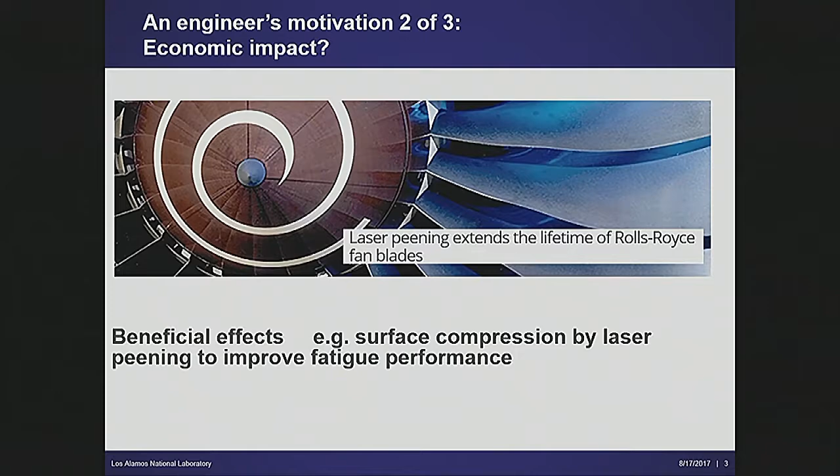You better believe that for a business that's $60 billion plus or minus, people are interested in whether or not those residual stresses have been put in reliably and uniformly, right? It's not science per se, because it's an engineering question. On the other hand, the tools that you've been learning about, whether they're neutrons or X-rays, can certainly address that question. And of course, a fundamental question for engineers: is it safe? This is a binary question. It's a question where the answer is yes or no, right?

Whereas we can vacillate a lot in the science and say, well, maybe, in the question of safety, it either is or it isn't. And so there's this perennial tension between product quality and process cost.

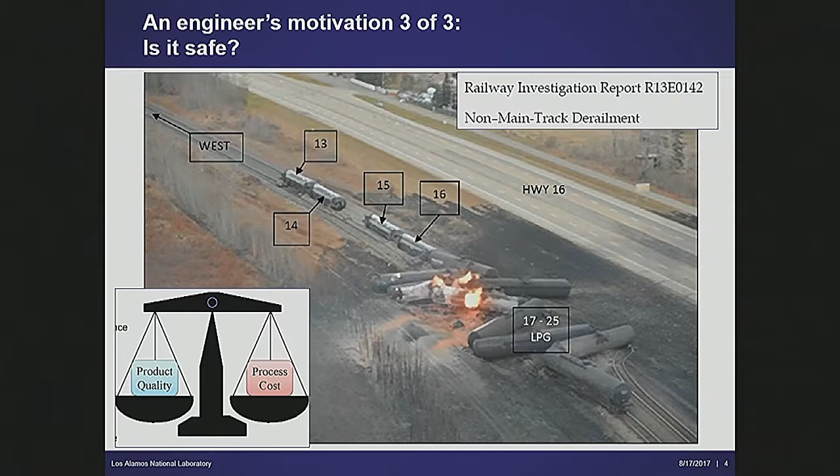Let's broadly lead into the discussion, but if you picture those sorts of questions and map them to the insights you've been getting, whether it's in diffraction, reflectivity, or inelastic scattering, you can start to see, with the knowledge that I have, can I translate those insights to a community that doesn't care about the science but very much values the insight you can get?

So what I'm going to do for you is basically talk to you a little bit about Los Alamos, explain the engineering context of what we do, talk about LANSCE for a few moments, then hopefully add a little bit of value by giving you some historical perspective of the stress measurement technique, for those of you that are mechanical engineers, and those of you that are interested in how you ended up with the measurements that you're doing on HFIR, on friction stir weld, or the sorts of activities going on at Vulcan. I'll talk about instrumentation, then I'll talk about basically two examples.

One relates to a uniquely neutron measurement, which relates to bridge cables, and the second relates to a series of relatively new activities we've been doing at the APS. The reason I chose those two was both to identify the opportunities with neutrons and to show, to some extent, the complementary aspects of them.

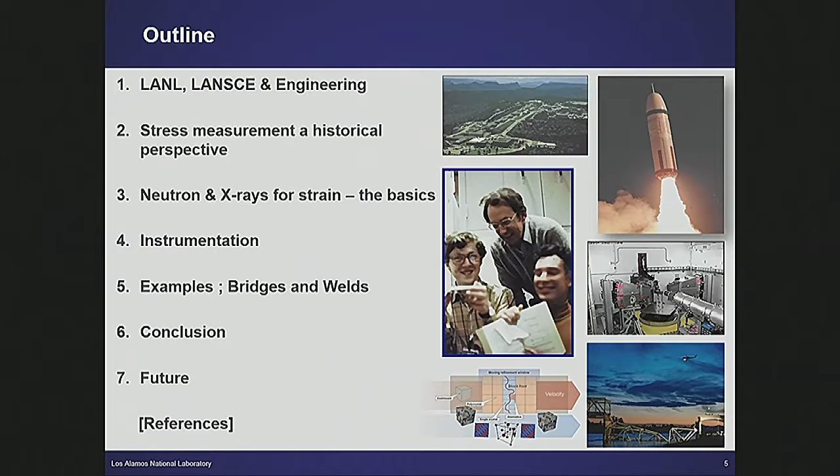Oh, by the way, I'm quite happy for you to jump in with questions if you want to interrupt as I'm going along. It makes it more interesting for everyone.

So, Los Alamos. There are—you've been at Oak Ridge, you went to Argonne—there are two national labs. They're both part of the Office of Science, BES-funded labs. There's another class of labs funded by the NNSA, the National Nuclear Security Administration. Los Alamos, Livermore, and Sandia are the primary ones. The Los Alamos budget is about $2 billion a year. It's got about 10,000 employees.

About half of those employees work outside the fence on a range of scientific endeavors, primarily focused on and underpinned by national security issues. So it's everything from cybersecurity to infrastructure, roads, biological—you can map national security to lots of things.

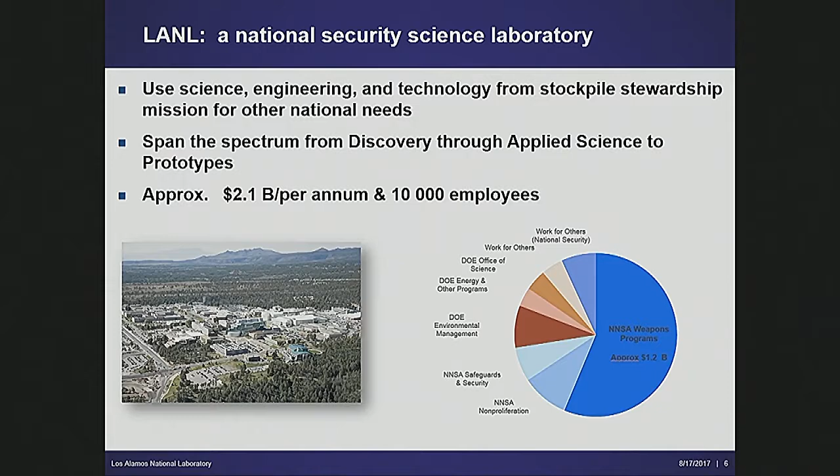But the key activity at Los Alamos, and the reason it's been there since 1943 or so, relates to the nuclear weapons program. The key mandate for Los Alamos right now is how do you establish and satisfy yourself that weapons in the stockpile are safe, reliable, and secure.

At one level, that probably seems like a relatively benign question, but at a different level, you need to be confident that something that's been sitting in the stockpile for 20 or 30 or 40 years is going to operate just the way you want it to. This is a very complicated system—it's undergoing radiation damage, thermal cycling, and some corrosion.

Without going into the details, you can dig into that and find there's a lot of engineering questions relating to corrosion, thermal cycling, cracking, and fatigue cracks that exist in these rather complicated, important objects. And so for that reason, Los Alamos supports—

Actually, yeah, this was just making my previous point. Some of the engineering challenges we engage in relate to: if you're going to replace a material using an additively manufactured component, what are the questions you need to ask in order to be confident that a component with a very different microstructure behaves the same way in an extreme environment?

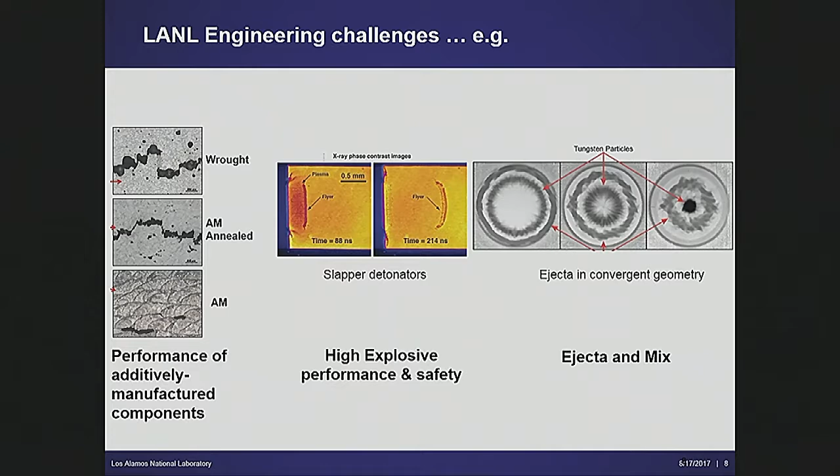And then there are lots of questions relating to the fundamental physics of mechanical performance under extreme conditions. It's not really a talk about the dynamic issues Los Alamos cares about, but you want to be confident that a metal that performed and deformed in one way 20 years ago performs the same way in 2020. By virtue of that fact, Los Alamos supports a variety of facilities.

There's probably a dozen or so facilities, ranging in scope, to actually probe material science questions in different ways. The one that's pertinent to us here today is the Los Alamos Neutron Science Center.

Before there was SNS, there was IPNS, and after IPNS, there was the Lujan Center. The Lujan Center hangs off a linear accelerator, a proton accelerator, 800 MeV, about a megawatt in power. There are basically 5 facilities that run off this facility, which qualitatively from 30,000 feet looks similar to SNS. It's very different in practice.

There's the Lujan Center, which has got a variety of instruments not dissimilar to the ones that are here. Power of the source is probably 10, 20, 25%, depending on the metric you want to use. But you can do the same sorts of things that you do here, primarily focused on diffraction and engineering physics right now. There's a facility for doing nuclear physics, which is a fast neutron unmoderated target.

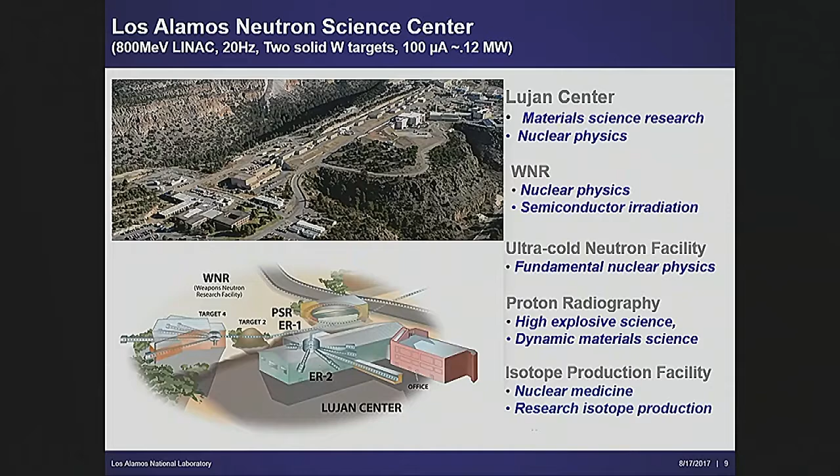There's a lot of isotope work that goes on there. There's a UCN facility, an isotope production facility, and also a proton radiography capability where we do a lot of dynamic radiography, studying shock and materials response at the microsecond to nanosecond timescale, primarily relating to capturing detonation.

So now with that as preamble, let me turn to a brief historic perspective of stress measurements. I think that you're doing measurements at HFIR. Good, all right, so a few nods, that helps.

For context, I started making measurements at the Dido and Pluto reactors, using very similar approaches to the sorts of things you're doing at HFIR. I graduated through and eventually built one of the engineering spectrometers at Los Alamos called SMARTS, which is a variation on Vulcan.

To put it in context, and I think this is just to let you see the background of how you've ended up here. I'm gratified to see that 10% of the people were engineers, the opportunity for actually using these for engineering. But to put it in context, residual stresses, residual strains were first alluded to in about the 20s by Heyn, who suggested that there was some kind of elastic strain present after plastic deformation.

In the late 40s, Greenough actually defined the term residual strains in plastically deformed metals. And then pretty quickly after that, this parlance of type 1 macrostresses, type 2 microstresses, and type 3 microstrains came into being.

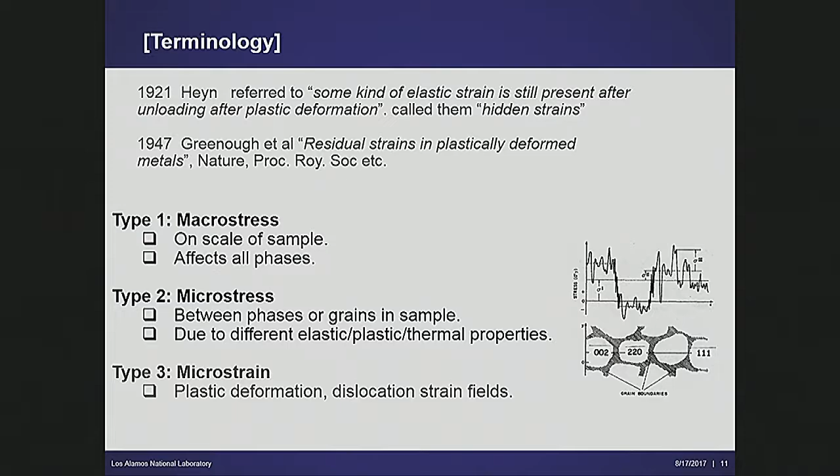The fact that neutrons could potentially touch the problem was first recognized in the 70s, where Hank Prask, who was working with guys from the Navy, mostly at NIST, made this observation: neutron technique may be sufficiently sensitive to strain as induced by residual stress to have practical utility.

Neutron depth profiling might be useful for measuring subsurface residual stresses. It's an observation that, because objects are metal, you can still get an appreciable neutron signal through an inch or so of steel, you can make measurements. And they made this observation: depth profiling might be useful.

The first actual measurements of neutron depth profiling with residual stress happened in the 80s. Those of you that have spent any time at NIST might possibly recognize a very youthful looking Andrew Allen, who works there on their small angle scattering program. This activity led to a paper in NDT, a non-destructive testing journal.

This led very quickly to the first commercial work, as people saw what they could do, and then the Dounreay fast reactor said, well, okay, can you make some measurements of residual stress in a weld for us? And they took the first chunk of money for actually doing these measurements at the Harwell reactor.

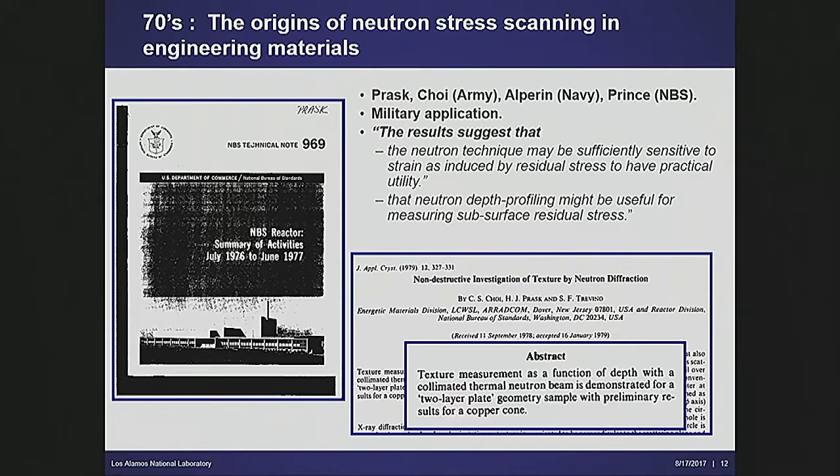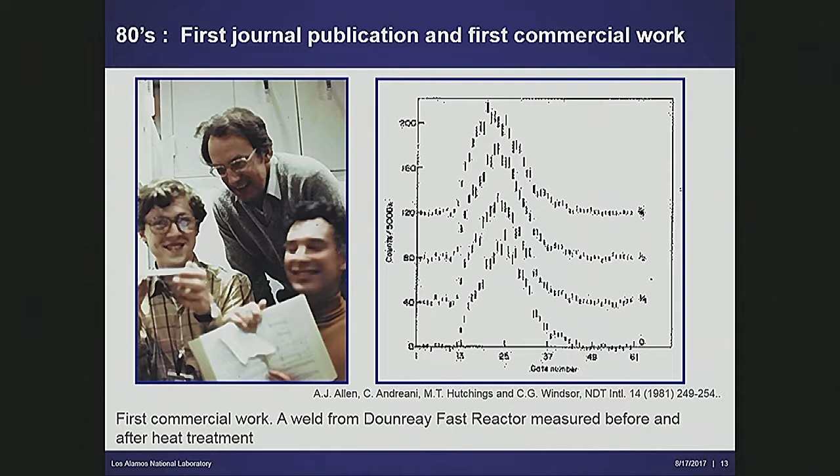In passing, I would note that in the community, there's a little bit of tension as to who did this first, because this set of people, actually, they're not around these days, wanted some credit for doing it first. But actually, the first people that got journal publications were this other set. So in the community, there's been a little bit of tension on occasion looking about that, but it's ancient history now.

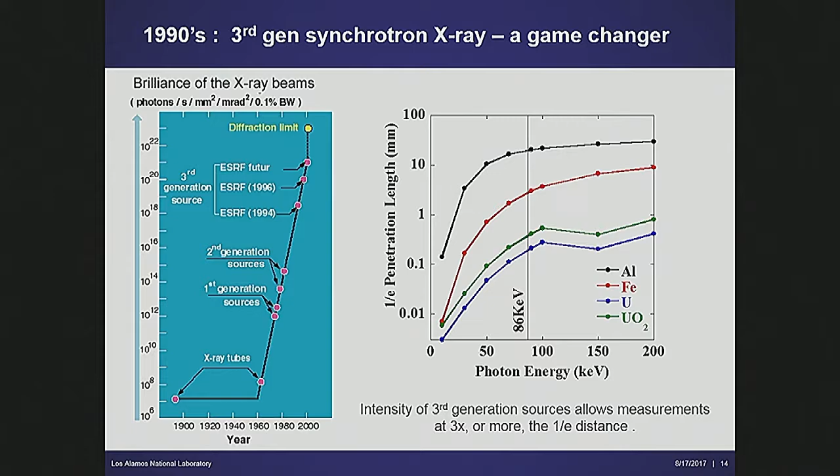Over the course of the 80s and into the 90s, the mechanical engineering community said, wow, neutrons are fantastic, how are we going to do this? Then in the 90s, third generation synchrotron X-ray sources came along. In 1990, if you'd asked me how to do a residual stress measurement in a piece of steel this thick, I'd say the only game in town is neutrons. Now, with high energy photons between 50 and 150 keV that you can tune, you can push through appreciable thicknesses of materials - low-Z materials like aluminum, but even things we care about like uranium, you can get through pretty big chunks of material. The nature of the measurement is a bit different, and there's plenty of space and complementarity between the two techniques, but it's important to look at both at the same time.

Another important note: if you're going to engage an engineer in the unique measurements you want to do, one thing they care about is standards. They want to be confident that a measurement at SNS is the same as a measurement at ESS, is the same as a measurement at Los Alamos, if they're going to draw a conclusion beyond what you'd put into a peer-reviewable paper. In a peer-reviewable paper you can have caveats - you can say here are the measurements, and legitimately note some errors. But if an engineer is going to decide whether a bridge is safe based on your measurement, you've got to have standards.

Over the course of the 90s, there was a lot of work, particularly in the neutron community, to establish and define standards for making measurements. That meant a series of activities making what were called round-robin samples.

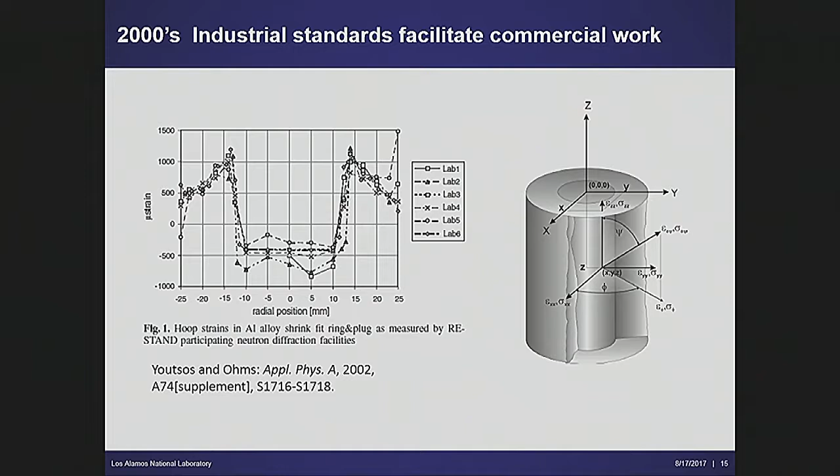If you're writing an intuitive paper just asking what the stress profile in the system is, it doesn't matter - I can give this talk perfectly happily. But if you're going to draw a conclusion about whether something is safe in some application, you better understand why these labs measured something 50% different on the same samples. It's not far removed from the discussions about calibration and standardization that we all have as good scientists - it's just got a bigger impact. People won't take you credibly if you can't say a measurement at Oak Ridge is the same as a measurement at Los Alamos, or at some other reactor. So I'm just drawing your attention to the importance of that.

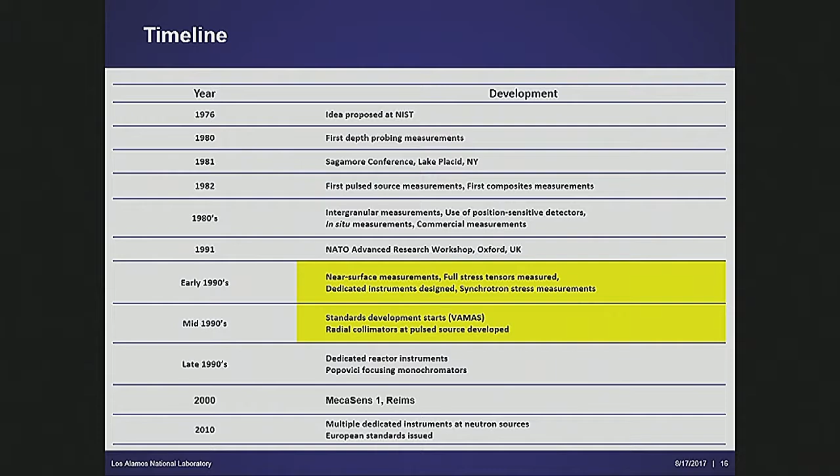This is just the time scale: the first ideas were proposed in the 70s, the first dedicated instruments appeared in the 90s and late 90s, and now you've got instruments like Vulcan, plus a new instrument coming online at the ESS in about half a dozen years.

By now you're probably at least cosmetically familiar with neutron and X-ray diffraction for strain measurements. But let me revisit the importance a little. A lot of the early work focused on macro stress measurements, type 1 stresses. It's easiest and most tangibly visible here.

You generally don't think of rail track as having a lifetime. Most rail is certified for a billion tons, though I'm not exactly sure what the metric is. The lifetime of any particular piece of rail relates to whether it's on a curve, friction, lubrication, grinding, temperatures, and how well it's supported underneath. All of these matter for fatigue cracks propagating through the rail. But another big factor in whether something fails is the residual stresses in the rail. When you fabricate rail, you get residual stresses of the sort you're now qualitatively familiar with.

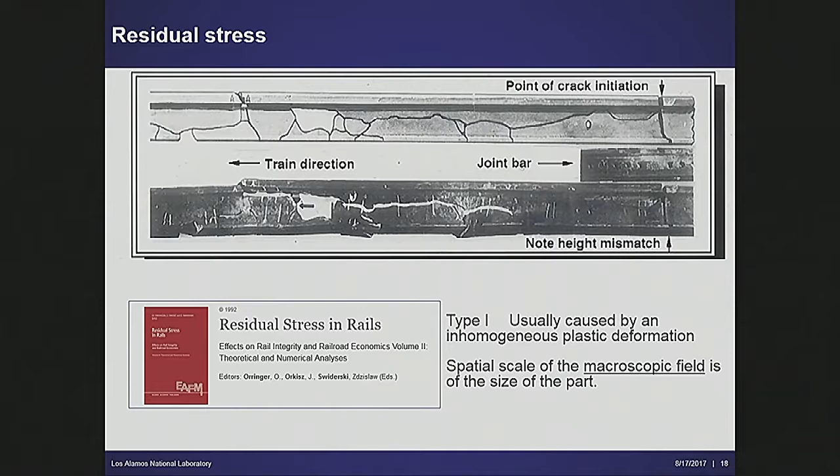That's why type 1 macro stresses are a really big issue, and why people spend a lot of time understanding and modeling them.

As a first approximation, engineers see cracks like this, and they're very good at running continuum mechanics calculations with finite element systems to predict continuum material performance and say safe or not safe, based on the kind of safety factors I mentioned in that silly comic at the outset. You put a safety factor of 2 on it and you can be reasonably confident it's going to be safe.

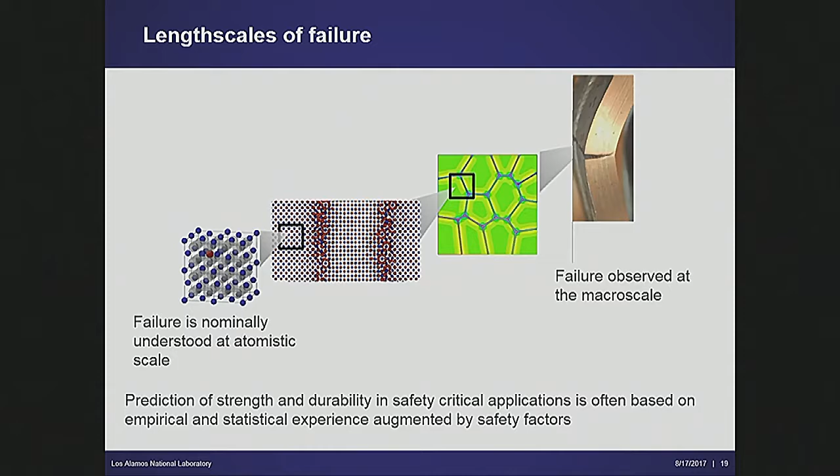Physicists at the atomistic level are reasonably deterministically confident they understand failure and how deformation takes place at that scale. The big challenge for materials science and engineering, to get the most out of measurements, is the middle region: around the microstructure, defects and interfaces—what you've likely heard called the mesoscale. That's where a lot of focus goes into making the jump from macroscale performance predictions to deterministically understanding things like grain boundary behavior and phase separation, and linking them down to deterministic models at the atomistic scale. I'll come back to this at the end of my talk.

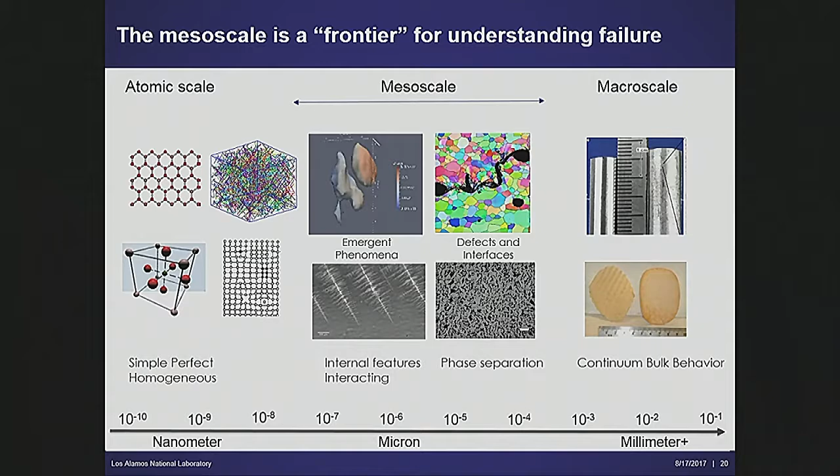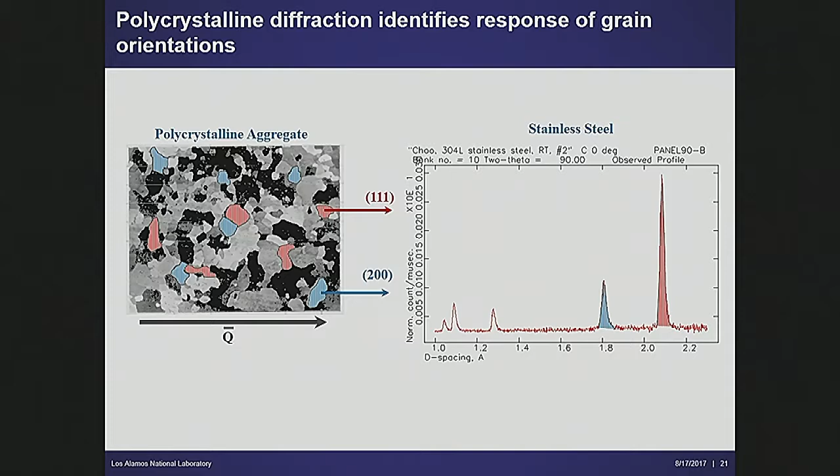By now you're familiar with polycrystalline diffraction. When you see these peaks, you're basically selecting out a set of grains in a particular orientation with respect to a particular load to make the measurement. In a cubic millimeter of material with a grain size of a micron or so, you've got a billion grains, and you're only looking at a subset of those. When you do diffraction measurements, you can pull out a peak position, a peak width, and a peak intensity.

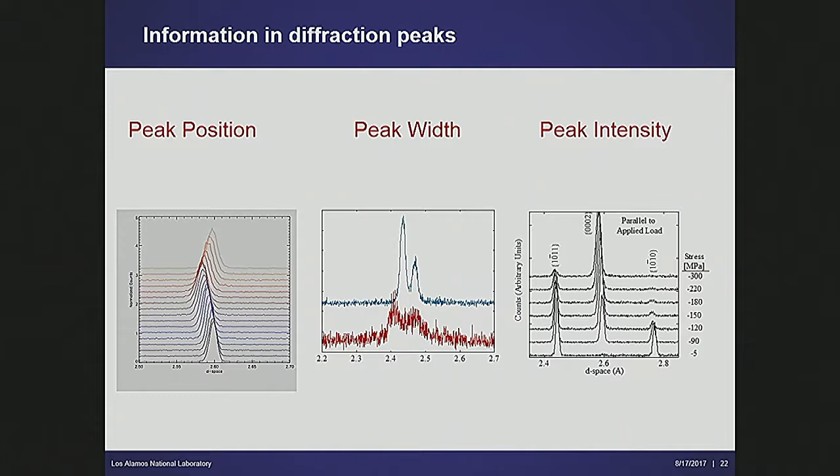From the peak position, if you put a load on it, you measure changes in this position. You can relate it in principle to the macrostress, type 1, type 2, possibly even the type 3 strains in the material. It's worth noting, though, that the peak position is also sensitive to chemical composition, the D0 problem you've been exposed to, and temperature.

The key issue here is that your engineer is asking you about these stresses because he or she knows how to relate that to a lifetime prediction. If your measurements don't account for this or for that, you can get a result that is basically meaningless.

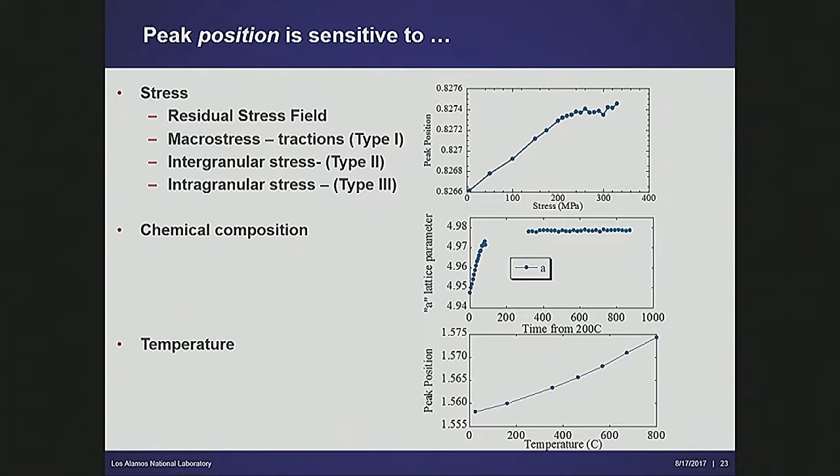Although we don't spend a lot of time doing it, you can also pull information out of peak width. It's the subject of a talk, a rather more sophisticated talk. We spend a fair amount of time at Los Alamos relating peak widths to dislocation densities. You can do that on any high resolution instrument, such as the ones you have here. You can relate this sort of dislocation density to radiation damage. It's another engineering related problem.

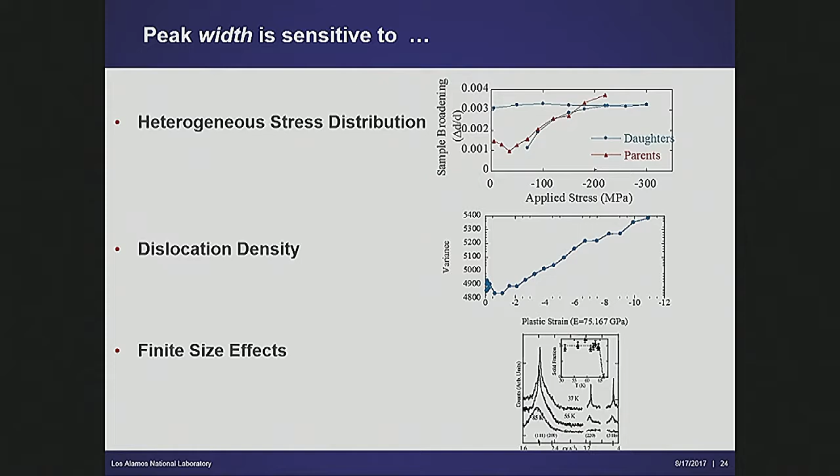And of course, in the diffraction pattern, you can also pull information out from the peak intensity. In a composite, different phase fractions, you've got texture, which is a huge deal, and disorder.

I think as we go along, somewhere along the line, you might naturally say, well, what are the problems for which a reactor is better suited, and what are the problems for which a spallation source is better suited? Considerations about position and width and intensity, and how much information you get out in an individual measurement, all relate to that. There are classes of problems which you do better at a reactor and classes of problems you do better at a spallation source.

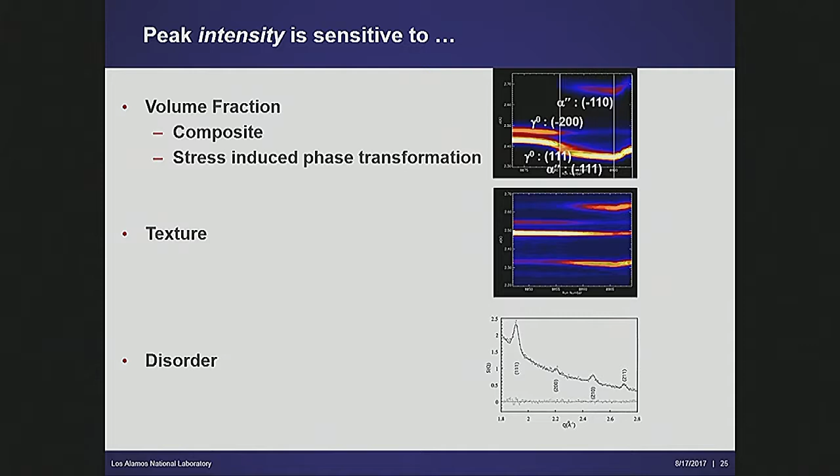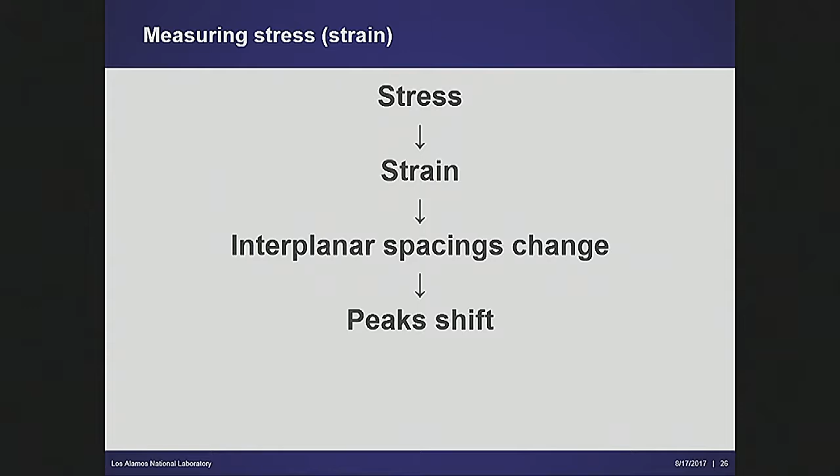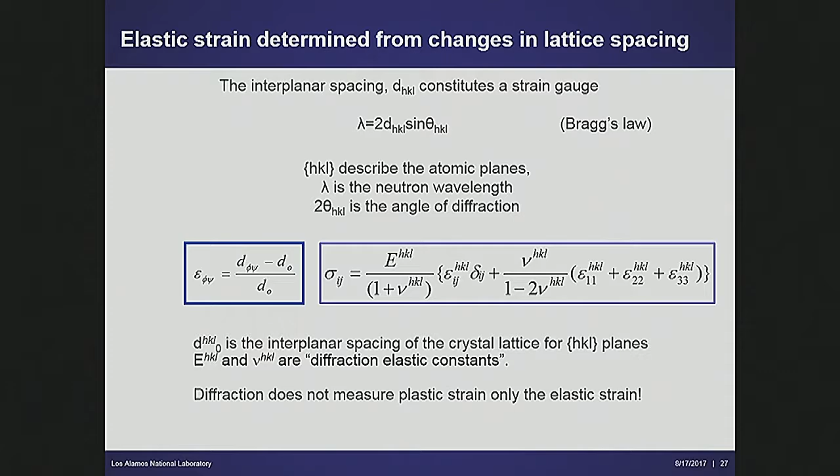By now you're familiar, I think, with this relationship between stress, strain, and interplanar spacings. Here's my one equation, Bragg's law, let me not belabor it. Strain, D0, I know you've talked about it. And then, when you actually make the step to convert to stresses, there's something else that's important, and that's the stiffness of the material.

So where can you go wrong with doing stress measurements? I shouldn't say go wrong—what are the things you need to consider? When you use diffraction for doing a stress measurement residual in the material, you're basically just looking at these sort of springs, these spring constants pulling atoms apart.

D0 is affected by chemistry. The other thing that you may not have been paying much attention to yet is the fact that the stiffness is HKL and texture dependent, so that the stiffness between these grains for different lattice reflections is different in one direction than it is in another. You have to understand that, and how that stiffness varies both intrinsically in the crystal.

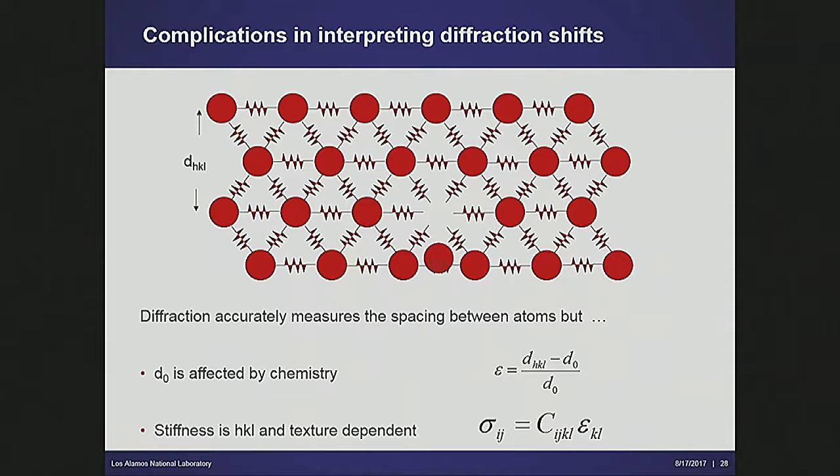Particularly in materials which have been heavily processed, the presence of texture can significantly affect the macroscopic properties in different directions. There are other complications.

The scattering geometry is one of the big issues with stress measurements. If you're doing spatially resolved measurements, and the sampling volume comes out close to the surface, instead of being fully immersed it's only half in and half out. What that does is introduce artifact peak shifts that can also affect the results.

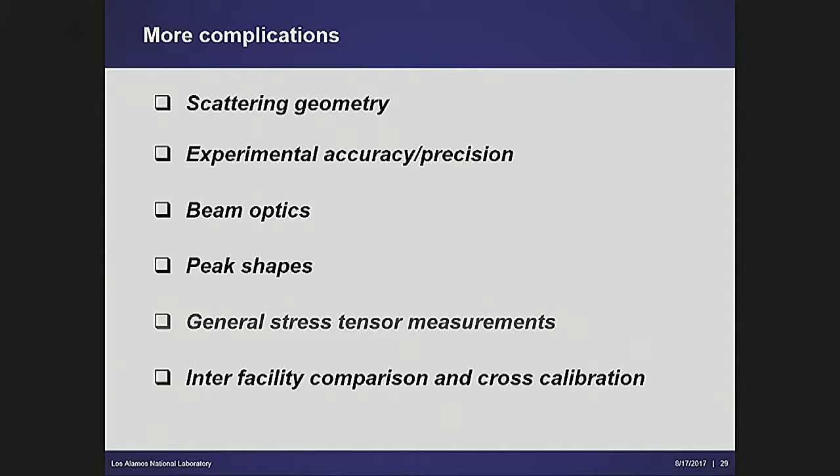There's also beam optics and peak shapes to consider. If you're going to make the step from strain to a true stress tensor, you don't get to do that with just 3 measurements—you have to make a minimum of 6, and potentially more. Very few people do that. And then there's this question of interfacility comparison. All of these things are complications to actually doing good science.

So now let me spin over some instrumentation, and then I'll get to the 2 examples that I want to talk about, probably more interesting to you.

First approximation, for neutron measurements, there are sort of 2 modes, spatially resolved. At a spallation neutron source, you do it with radial collimators. At a reactor source, you typically use apertures pushed up close to the sample. Both facilities frequently support measurements with load frames—there's lots of science you can do by putting a known load on there.

At a high energy synchrotron X-ray light source, the typical mode is to take X-rays—if you're doing engineering work where you have to get through appreciable thicknesses of some polycrystalline metal that is engineering relevant, you're typically operating at 50 to 100 keV.

That means that because the wavelength is short, your diffraction is now unlike in the reactor neutron source, where your wavelengths basically allow diffraction at 90 degrees, which helps you define a nice, easy, well-defined sampling volume, a little sort of cuboid, roughly there. You can even go into sort of a backscattering geometry.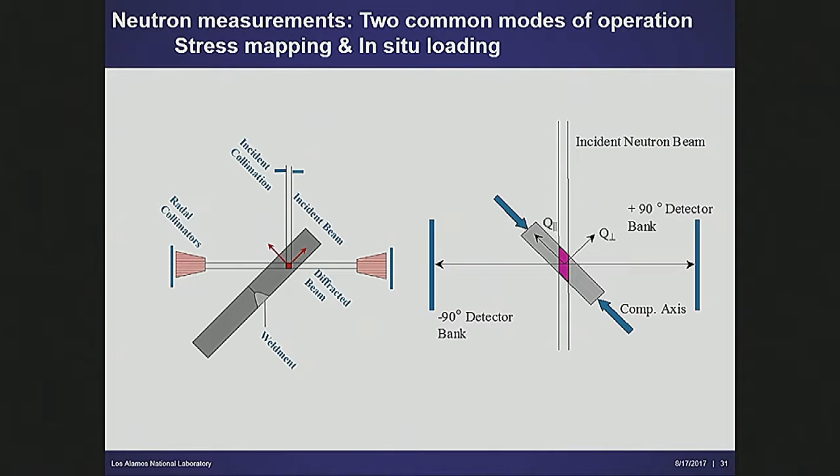For most engineering measurements at the light source, because you've got short wavelengths, you're typically looking in a forward scattering direction, and so you're putting all of your diffraction rings on a detector that's downstream, and you don't have that same ability to define a sampling volume that you do at a neutron source. It doesn't mean you can't do measurements, you can do very good measurements, but you can't define the 3D space.

The emphasis on engineering scale components means that instruments typically have to accommodate big objects. One thing engineers do not like doing, for the most part, is inferring something from a sample that's been cut out of the part that you care about, right? So you can see a wing spar, you can see a jet engine. These are engineering style objects that have been brought to a facility, and so the facility has to accommodate that.

The corollary to that is that there's a series of compromises in designing an engineering instrument that make it different from an instrument that's optimized for doing just diffraction. For a long time, diffraction measurements at sources such as SNS, such as Los Alamos, said, okay, my sample is going to be a powder, or it's going to be something a few cubic millimeters. And so I'm going to build my instrument to have the best possible resolution, the lowest possible background, and the best ability to put an environment on a sample and collect the diffraction data that I want.

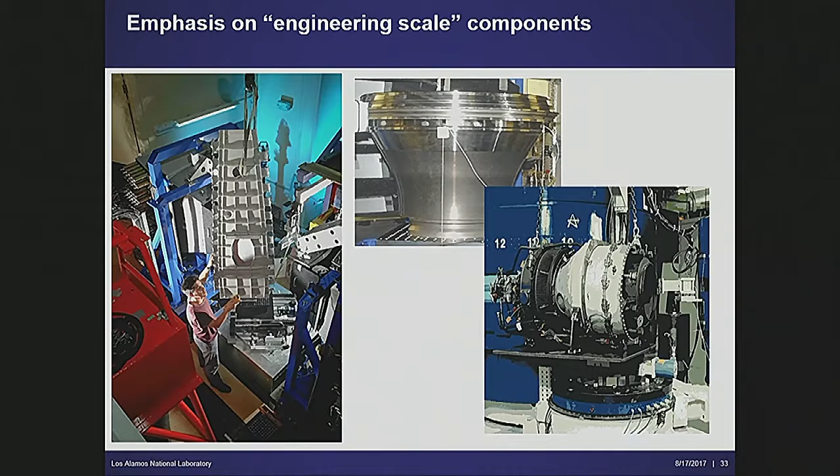For engineering instruments, because you have to handle the wing spar from an airplane, or a jet engine, you need to be able to align it to micron scale spatial resolution. You need to be able to accommodate objects that may weigh 1,000 kilograms or more, move them around, and then have apertures that come in as close as possible, and put radial collimators in there. And so you end up with instruments that look very different from classical powder diffractometers.

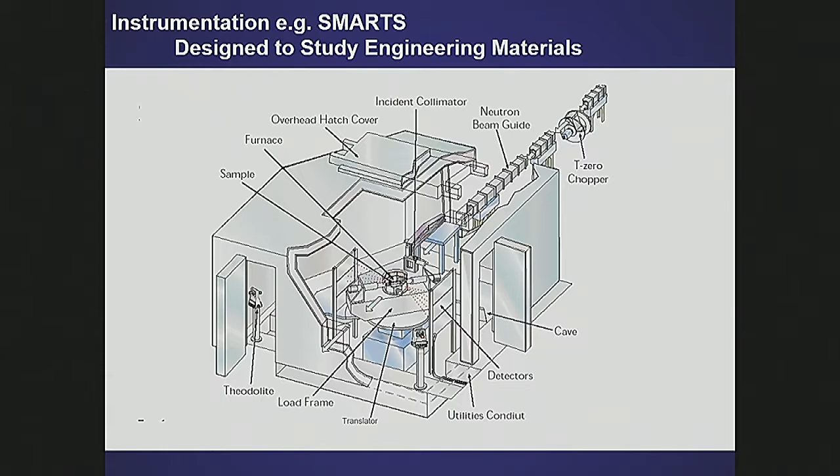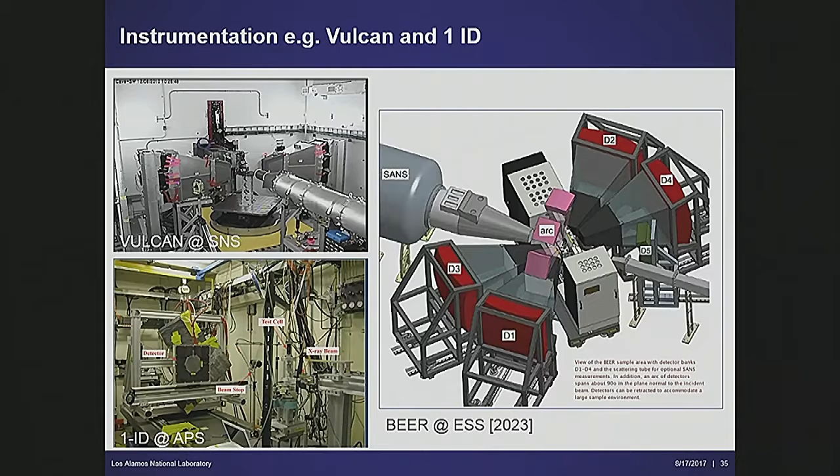I imagine you've looked at Vulcan. SMARTS looks very similar. And of course, in the future, if you want to see where people are going with this, this is a concept for the BEER engineering spectrometer at the ESS, due online in half a dozen years or so. These two slides just show you instruments that existed. I pulled them from something else.

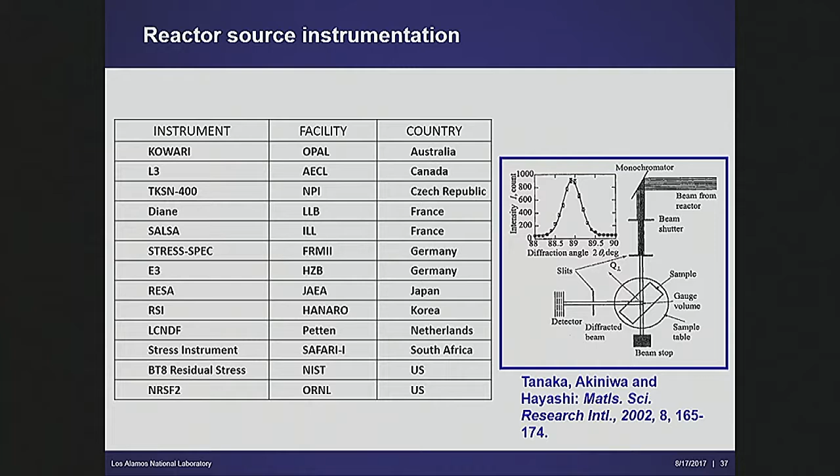So let me turn now to two examples that illustrate different aspects of what you can do with neutrons and X-rays. This is work by Chev Nguyen, Adrian Brugger, and some guys at Los Alamos, where they actually used neutrons to study 7-wire strands in bridge cables. Okay, so what's the problem?

There are 600,000 bridges in the US. Their average age is about 40 years. From a civil engineering point of view, about 1 in 9 is rated as deficient. So imagine how much traffic is going over these bridges. The worry is that it does this. To actually correct the deficiencies, and not every deficiency says that the bridge is going to collapse next year, but many say there's something you need to pay attention to, it'll be $20 billion. I'll leave it to you to decide whether or not we're going to spend that on US infrastructure.

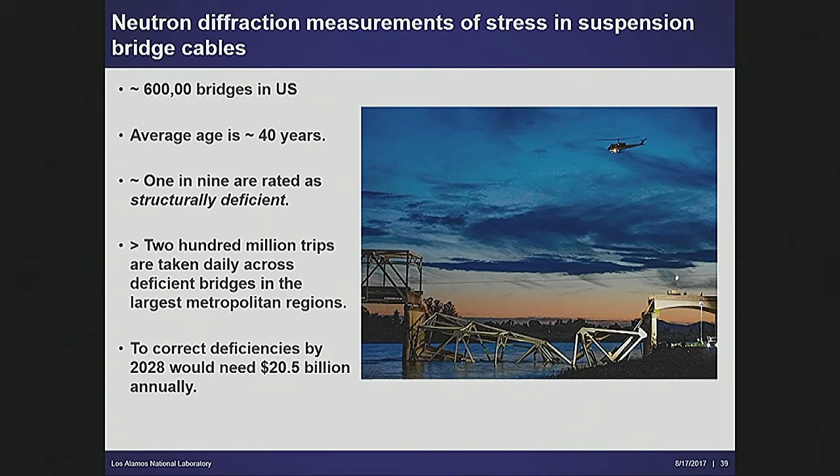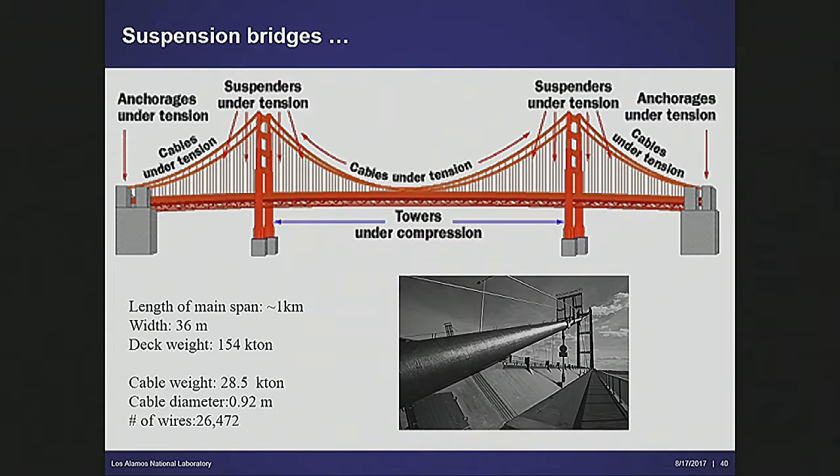One subset of the problem relates to suspension bridges. Elegant, all the load is carried by these cables that are under tension. They've been around since the Golden Gate Bridge and before. The bridge cables themselves, carrying all of the load, are comprised of a mesh of very tiny little cables with diameters that are small compared to this, which is a meter or two. And so you can see lots of individual cables running down the middle.

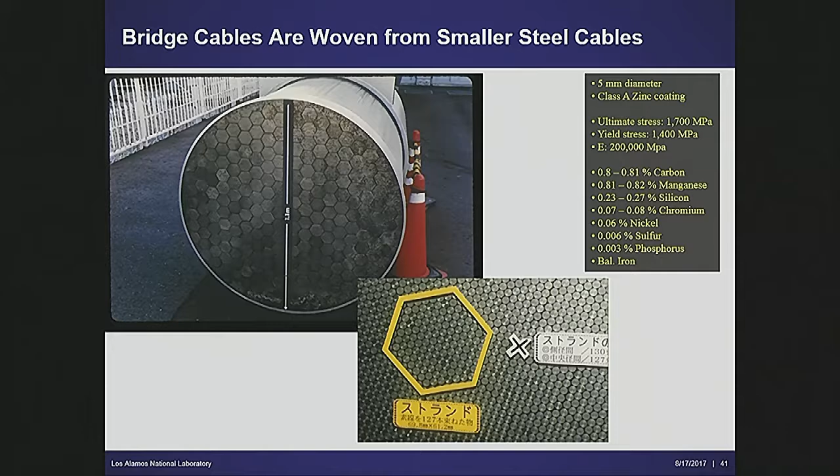And so when you look at the Golden Gate Bridge or the Brooklyn Bridge, this is what's inside the cables that are holding the roadway. It's well known that some of these individual strands break from time to time. It's not a big deal, right?

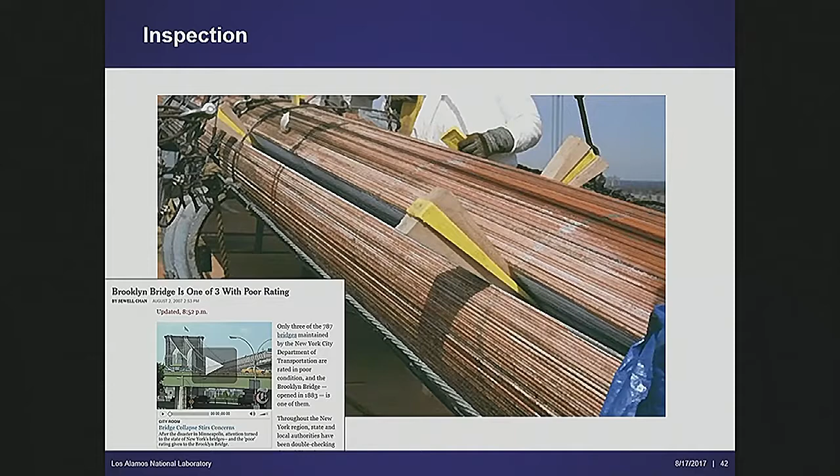The question for an engineer, and the approach to actually looking at this, is that from time to time they come in and pop open these strands, and they look to see how many they can see that are broken, and then they relate that statistics of breakage to some model that says we're closer or further away from a point at which we have to take this bridge out of service.

One of the questions that relates to the strands is, if you've got a bundle of strands and the one in the middle breaks, does that mean that it no longer contributes to the load-bearing capacity of the whole bridge? In practice, what actually happens is that if the strand in the middle breaks, because it's clamped at different locations, even though there's a break right here in the middle, some distance away from that break the strand is still contributing to the load.

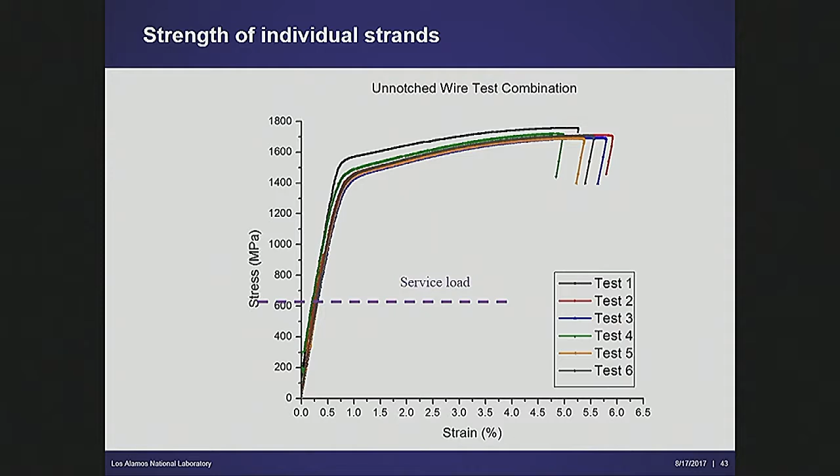How far that distance is fed into the calculations and relates to the models as to whether or not you should take the bridge out of service. Pretty big deal. And so a classic neutron problem is that suppose I've got a clamped bundle of cables, and a cable in the middle is broken. And I'm wondering, how far along the central cable or the surrounding cables can I see that there's a break in here? What you can do is define a sampling volume.

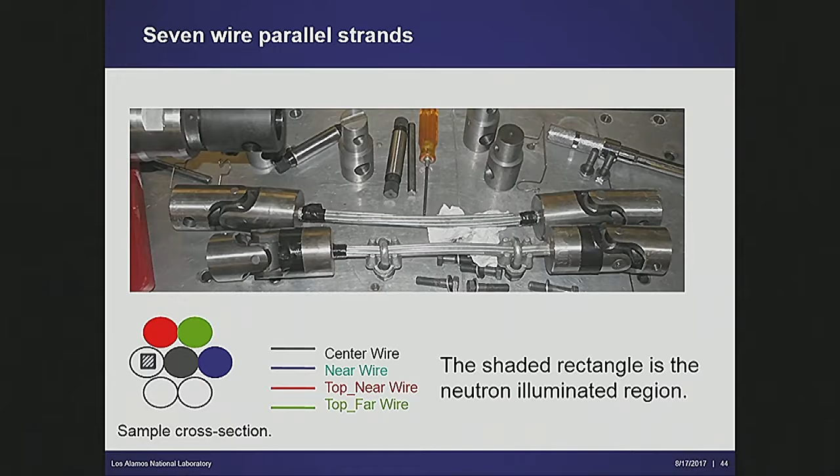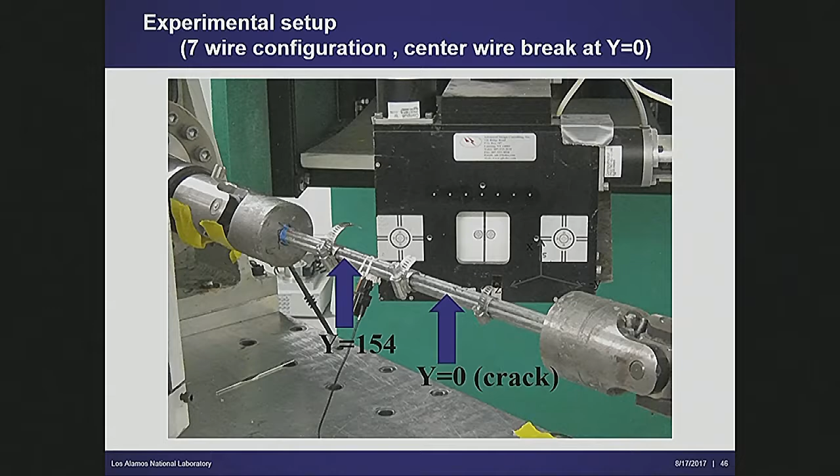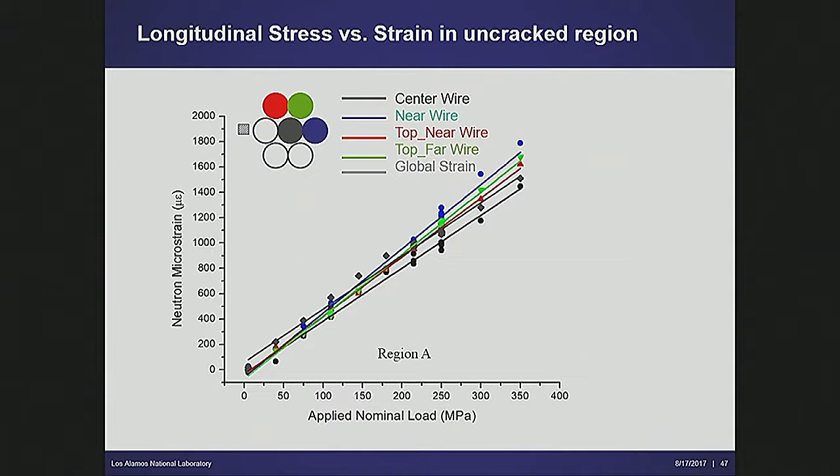You can put a load on this set, set up a situation which is probably fairly familiar by now: slit, sampling volume, radial collimators. Now you can ask what's the strain that exists in multiple places. You put a crack in the middle, you load it up. What do you see? If there's no break, all of these 6 or 7 strands, you look at them individually, show much the same response. Here's the applied load. Here's the measured elastic strain.

Everything's hunky-dory. When you get a break in just one of them, the whole thing doesn't break at that point. But this is the applied load: on the cable that broke, as you increase the load, the strain is now dropping. It doesn't go to 0. It's just unloading a little, while the surrounding cables take up more strain. So this is applied load, this is the measured elastic strain. The strand that broke is unloading. The strands that didn't break are taking up more load.

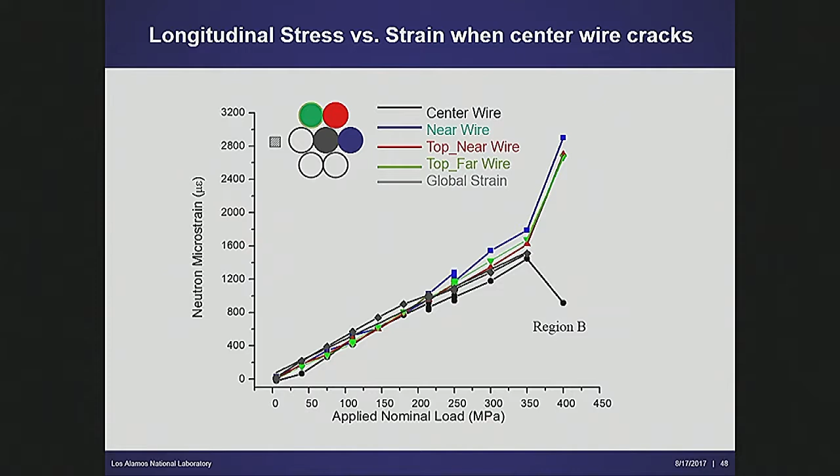And this reflects the fact that in this particular location you could make measurements in the broken cable and surrounding cables. Now, I'm only showing you a tiny subset of this overall study. I grabbed these slides from Don Brown before, but this work has moved on considerably since then. But it does show the neutrons can make measurements in here, and in here, and along the strands. That's a uniquely neutron problem.

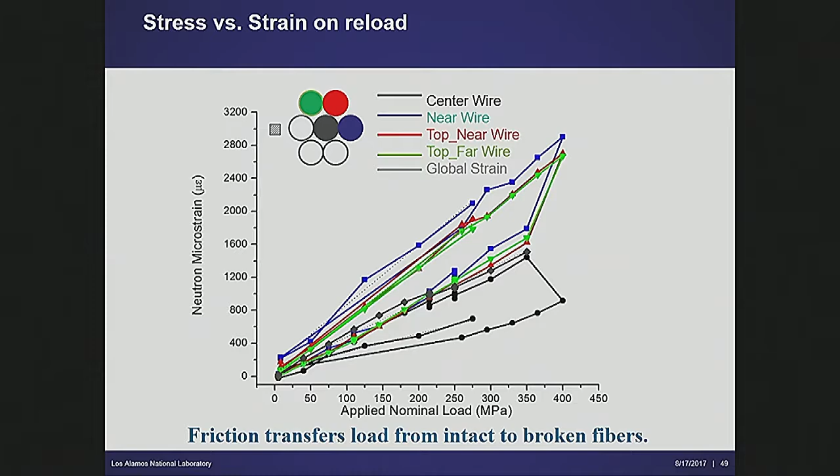So now let me turn to a uniquely X-ray problem. Additive manufacturing, 3D printing, much in vogue right now. The idea that you can net shape form a component by taking a powder, taking a laser, driving the laser over it, and you can build up the component that you want basically from powder. Much excitement about that. No shortage of excitement in places like Los Alamos.

The reason for it is that there's a lot of historical processing capability that doesn't exist anymore in the complex, and the idea that you could build up a part from a powder and a laser, and then an hour later, 2 hours later, you've got an object is very exciting.

Built-in functionality, particularly appropriate for somewhere like Los Alamos where you want to make small lots of complex geometries, right? There's a cost point there, right, for actually doing it. It has relatively minimal footprint.

There is a gigantic challenge that is by no means Los Alamos specific, and that's how do you certify additively manufactured material, right? How do you certify, it's what's called product rather than process-based qualification, right? How do you understand the process structure property performance?

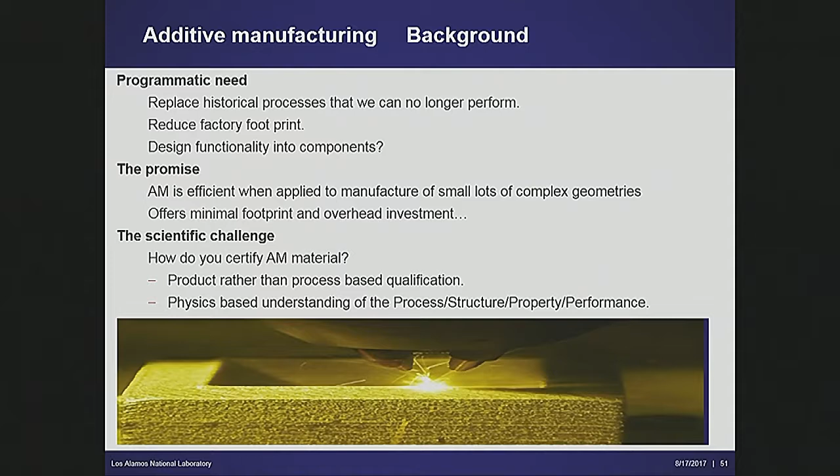The challenges in doing this derive from the fact that quench rates in additive can be as much as 1 million degrees a second. Phase changes, temperature builds, phase topography, starting powders, right? You've got a whole series of phenomena here that change from microseconds to hours and from microns to the scale of the component.

And so, because this is a new arena, the sorts of tools that you've been learning about, that study surfaces, that study bulk, that study phase, can be brought to many aspects of this. And I'm going to focus just on one of them, is that, for these phase changes that take place, you've got a lot of phenomena that are taking place at the sub-second time scale, right? It's rare, not impossible, but rare that for engineering measurements neutron sources can touch sub-second.

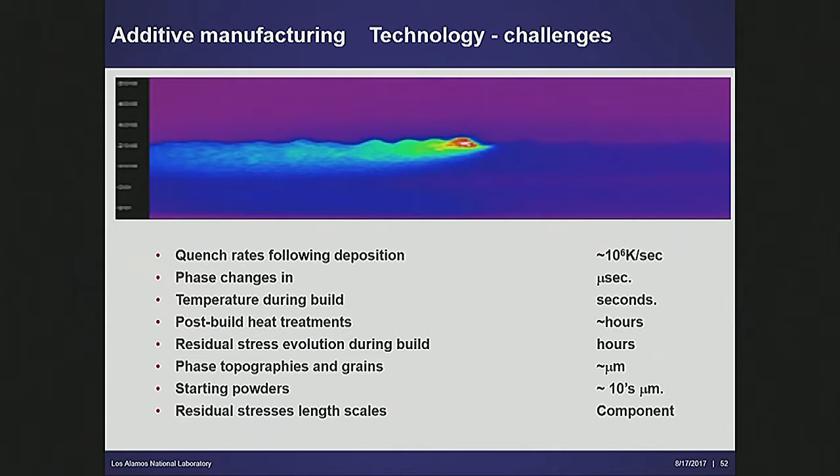They work much better for scenarios where you're actually looking at these heat treatments, right? You're looking at changes that take place over the duration of the build, which is sort of like minutes and hours. But we said we want to understand some of the phase transformation performance that takes place during an additive manufacturing process. And this is not quite additive manufacturing in the sense that I described it as a weld and powder, but

what John Brown, John Carpenter, and Jason Cooley did in collaboration with the folks at APS and 1ID was basically build this wheel, right, with what's called a cold metal transfer weld. Cold metal transfer weld is basically a variation on metal arc welding, in which you have a wire feed that comes out on a wheel. It measures the current and it pulls it back and brings it back in and out.

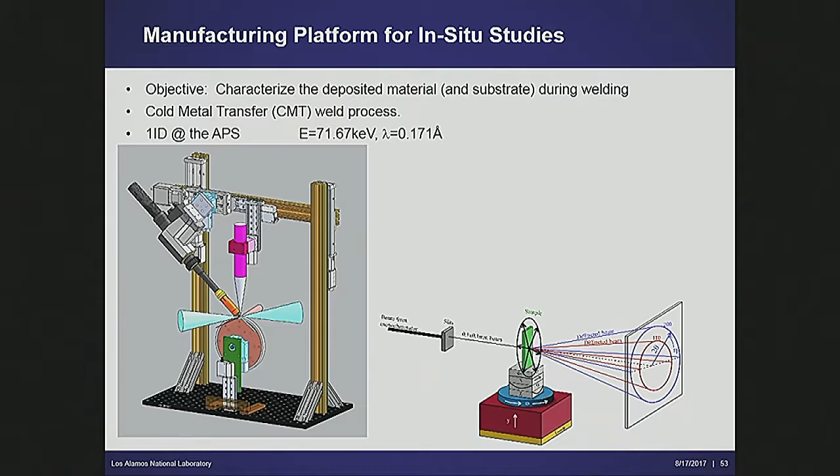We actually also put a laser on this, but we didn't use it for the data that I'm going to show you. We wanted to see how much you could actually infer about strain and phase change and diffraction as the welding process was going on. So, the weld itself, whoops, it's just a pretty picture.

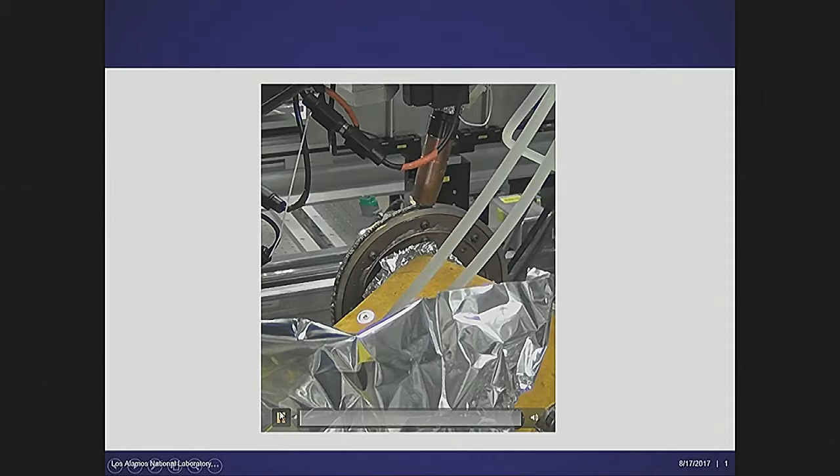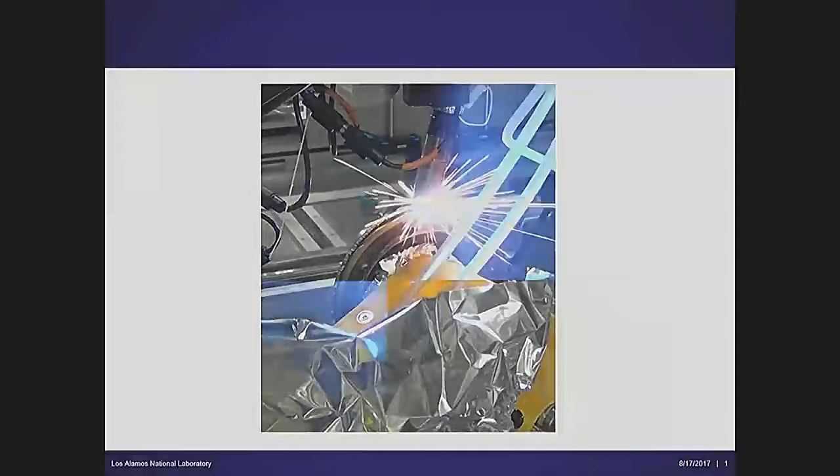When it actually starts going, you can see that this was in the hutch as the weld was being deposited, right? So what we're asking, using the X-rays, is actually what's going on in the middle of this weld pool as the weld is going around. And I can be pretty confident this is one of the first times that anyone's ever actually had insight on something like this.

The measurements that we made, and sorry, the resolution is a bit poor here, a last minute problem. There were two sets of measurements that we made, and there's a couple of things to think about. We made the weld with the wheel rotating, and the reason that we did that was that we wanted a fixed geometry whereby we could actually move both an imaging field of view and a diffraction spot relative to the weld pool.

It's not fast enough to actually get everything as it goes by. So we had the wheel going, we started the welder, and then we made measurements with the diffraction spot and then with an imaging field of view, and although it doesn't show it in the movie, we move this imaging field of view backwards and forwards. This right now is proof of principle that you can do it. The diffraction data, which I'll show you second, you can actually get more data out of it.

Remember that the wheel is rotating by about 1 millimeter per second. Diffraction count time is about 1/10 of a second. Diffraction spot size was, I think, 0.1 or 0.2 millimeters, and then it was about 1/10 of a second for the imaging as well.

The wheel is pulling it out. What you're looking at here was just proof of principle that we could do it. You can see this thing protruding out here, and occasionally what they're doing is dragging around the imager relative to the weld itself.

Where I'm looking right now is just on the top of the wheel, and this is the leading edge of the weld with a tenth of a second resolution. It's not quite good enough to give us what we want yet.

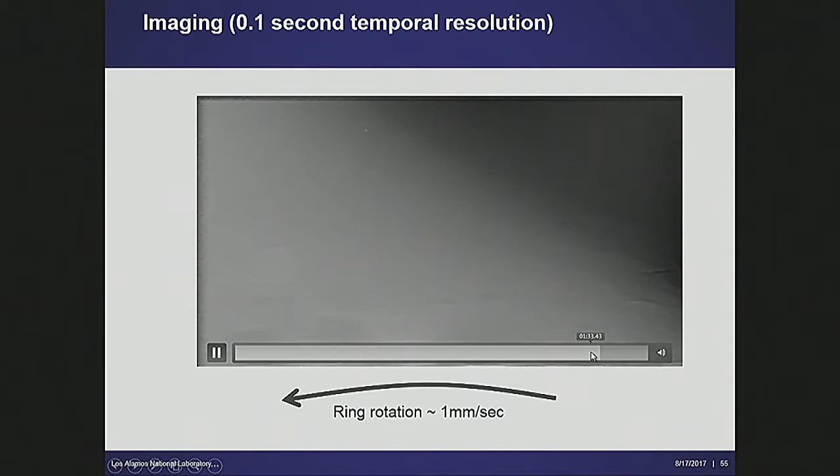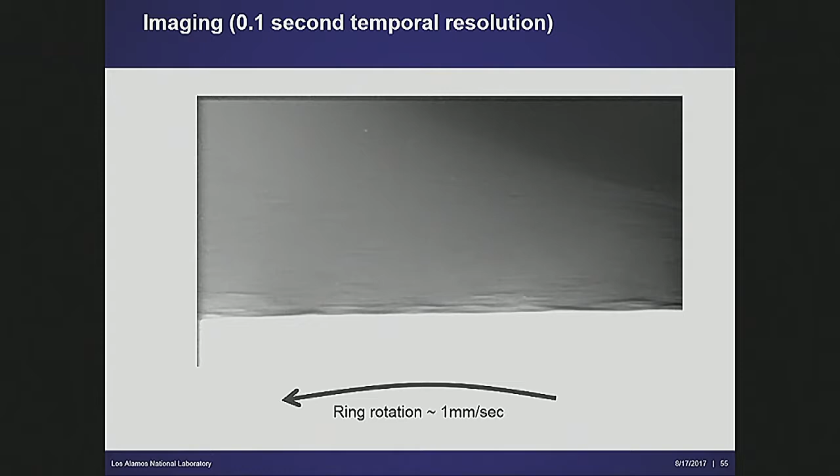Now if you watch it just at the end, you'll see they're moving the field of view. This white line was the wheel itself coming up into the field of view. It stopped, we turned it off.

If you notice closely, just at the end there, when you start it, it contracts. So it's still moving, you can see it shrinking, and then you end up with these sort of light features. Right now I'm not ready to say whether these features are at the surface, but some of these features are porosity in the leading edge of the weld.

It's easy enough to see them after it's frozen. The challenge for the technique is to actually be able to see whether or not you could draw some conclusions about this porosity during the weld process. If you could see it and extract the information, you could optimize the welding parameters.

Okay, so that's pretty pictures with a lot of potential, particularly if you can get better resolution and better temporal resolution.

Let's turn to diffraction, where it's a little bit easier to see something quantifiable out of here immediately. Here's the wheel. When we drop the weld down, initially the diffraction spot is sitting here. The weld will come back here, and I'll start the movie in a second, you'll see.

Now we're going to drag the diffraction spot in front of and then behind the weld. We did all of this manually, so it's not quite as elegant as you might hope to see, but let me run the movie and you'll see.

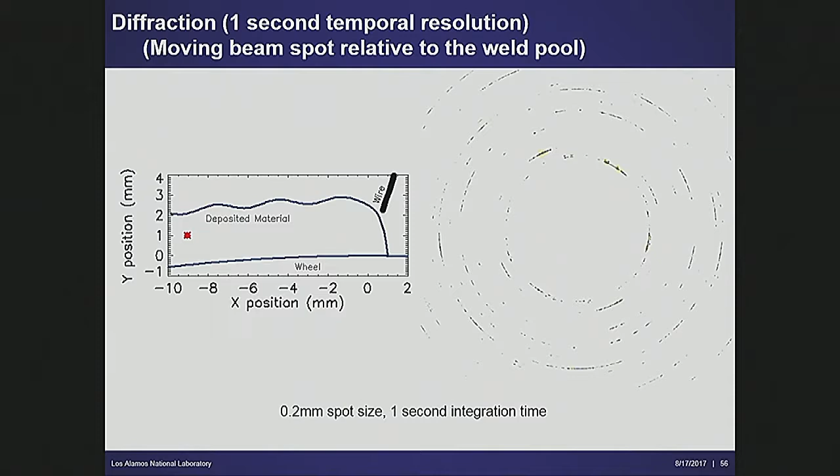And you can see that there's no longer molten metal here, and you've got a series of diffraction information on your transmitted diffraction detector.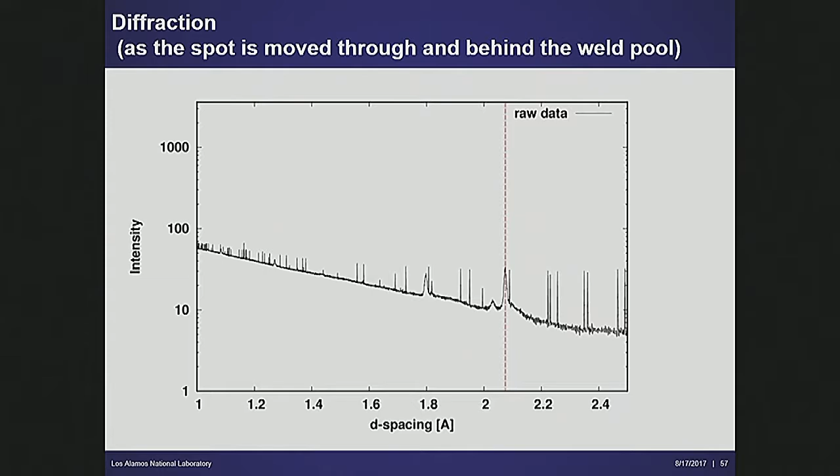A couple of things to note. I'll run it again. Look for the bump here, which is molten. You can ignore that jump right at the end. Just run it again.

Look, when I run it again, look for the bump here. Something else to bear in mind is that in this material, there's an austenitic phase and a ferritic phase—this is the austenitic phase, this is the ferritic phase. I want you to look at this dotted line. I'm running out of time, so let me go quickly.

Right, so I started it halfway through, but you can see the peak shifting to the left. That's as the material cools at the end. So now, if I just go through these one at a time.

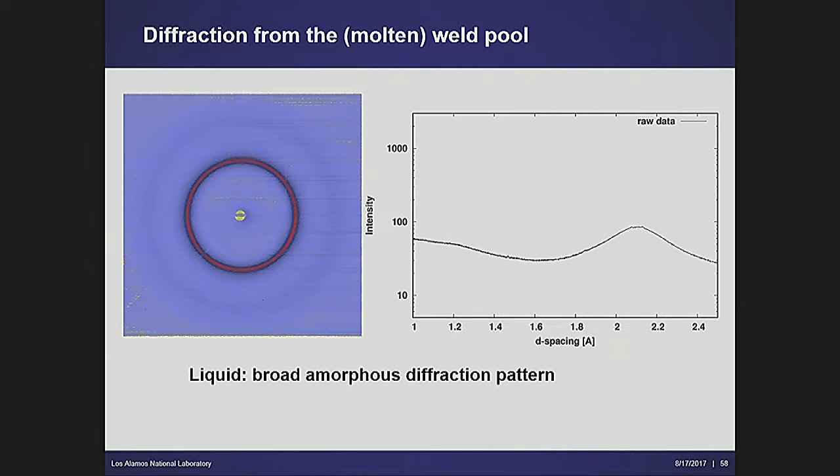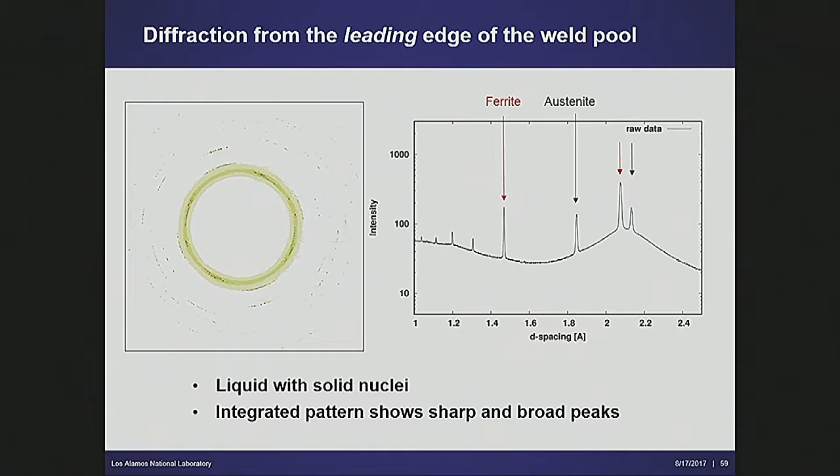In the molten weld pool, there are no diffraction patterns, just this big, broad hump that comes from the liquid. At the leading edge of the weld pool, look at the relative intensity of the ferritic peak and the austenitic peak - that's probably because what you're actually seeing is the wire feed.

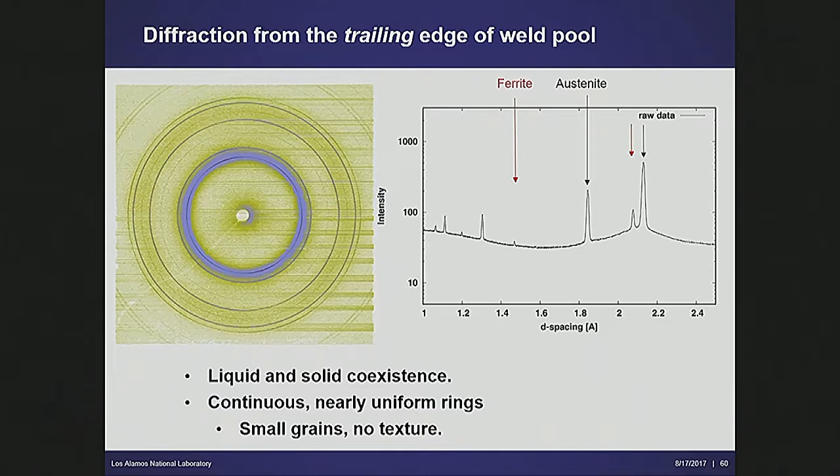At the trailing edge of the weld pool, a couple of things to note: you can still see the molten metal, and these rings are complete here right now. You've got complete rings, elegant, right? So that means you've probably got small grains and very little texture.

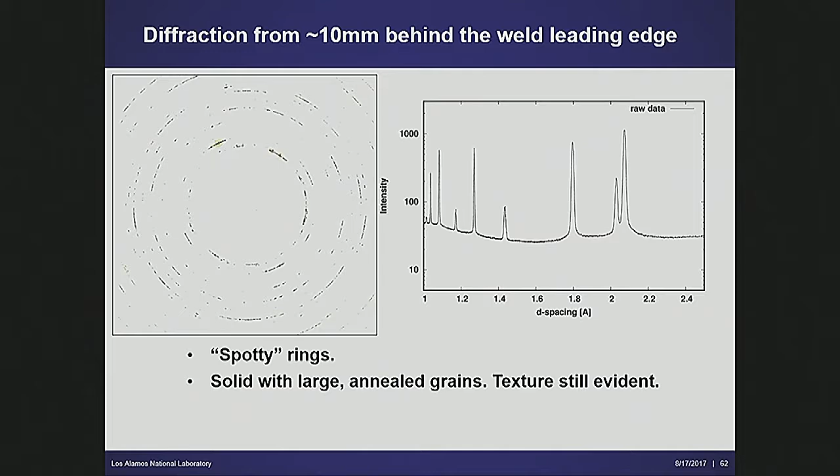So by way of conclusion, I hope I've shown you that diffraction is a measurement of elastic strain, phase, and grains in crystalline materials. Although I haven't belabored it, the time, length, and geometry of the experiment determines whether neutrons or X-rays are the better way to go. Although I haven't talked about it, in practice, neutron and X-ray measurements are often used as validation tools for other destructive measurements.

Because there's only one SNS and only one APS, you can't bring it to bear on every problem you have. But if you've got some other tool you're using - strain gauges, drilling, or some other approach - using the opportunities implicit in X-ray, neutrons and X-rays really helps.

For engineering measurements, because an engineering user is typically not an expert and has no interest in being an expert, there's a real opportunity for people at facilities to operate in that middle ground between doing fundamental science - the return on investment for facilities like this - while at the same time making measurements that impact the real world, whether it's optimizing a welding process, finding a new material, or seeing whether a bridge cable is safe.

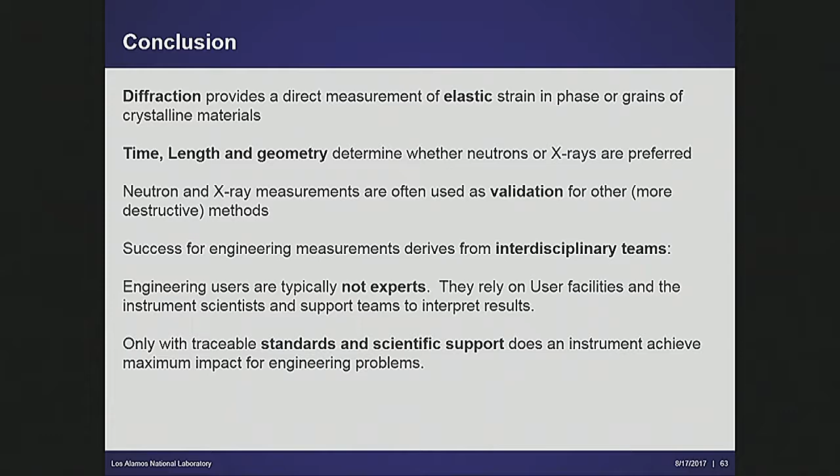Standards and scientific support are what makes instruments successful. And by way of conclusion, where do I see the future going?

This probably reflects a Los Alamos-centric view of the world, but the opportunities implicit in exascale computing and the massive computing power that's coming along means that for the first time you've really got the opportunity to actually draw insights on structure properties at the mesoscale and relate it both down to atomistic and up to macroscale.

And so I'm pretty confident that the future of our use - and this is now Los Alamos - of facilities like the SNS, like APS, and to be honest, of LCLS, the free electron laser, will relate to multi-probe, in situ, transient measurements of the sorts of things I've been talking about, and then relating them to exascale computing. So with that, thanks for your attention.

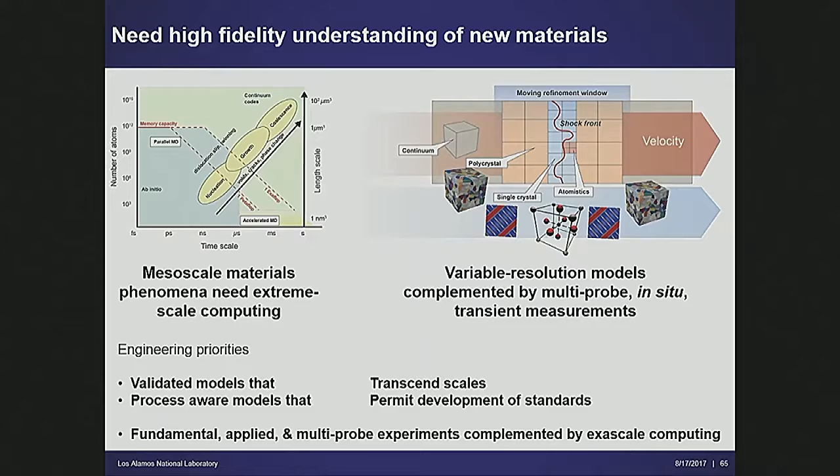Do we ever have problems with inelastic strain in these types of materials? And if so, how do we measure them?

Oh yes, the question was: do we have problems with inelastic strain? Whenever you're measuring the separation of the lattice planes and inferring residual stresses from that, I'm talking about elastic strain. When you say inelastic strain - if you put dislocations into material, so that the material is now this big instead of that large - you can have a situation where there are no macro residual stresses in there. If you just take a uniaxial load and put 1% strain on it, and now if I look at this location and that location, the d-spacing you get will be exactly the same. What will be different, because you've got dislocations, is that the peaks are broadened.

I alluded to that a little bit. So when you say inelastic strain, I tend to think about the broadening that you get from dislocations in material, and that's accessible, whether it's from radiation damage or plastic deformation. That's a variation of the sort of data you can get out of diffraction data. Now, I'm not sure if I answered your question or not. You did? Okay, good. Thank you.